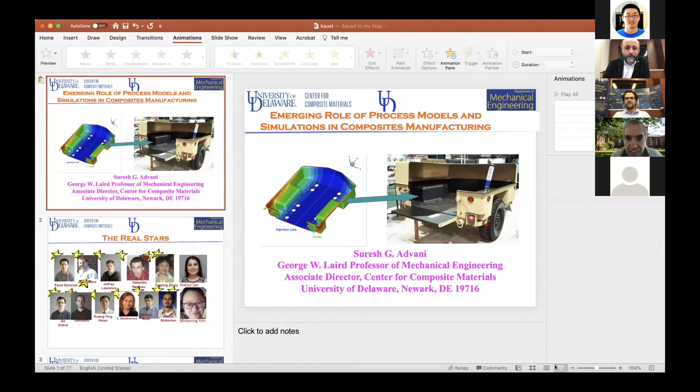In this session, we will gain some knowledge about how advanced modeling and simulation can help for processing, manufacturing, and design of composites. The first speaker in this session is Professor Suresh Advani, professor of mechanical engineering and associate director of the Center for Composite Materials at the University of Delaware. He will give us a talk on the emerging role of process models and simulation in composite manufacturing. So the floor is yours now, Professor Suresh.

Thank you for the introduction, and thank you for inviting me here. I know that we can't do this in person, but I guess this is the second best thing we can do. I've attended some of the talks, and I have actually enjoyed watching them. I know it's very difficult to keep the attention span when going through this on Zoom, but I'll try to be brief and not put too much time into extra things here.

So basically, today my goal is to show you how numerical simulations are slowly becoming more and more useful in manufacturing, with one of the simulations that we have developed over the last 25 years.

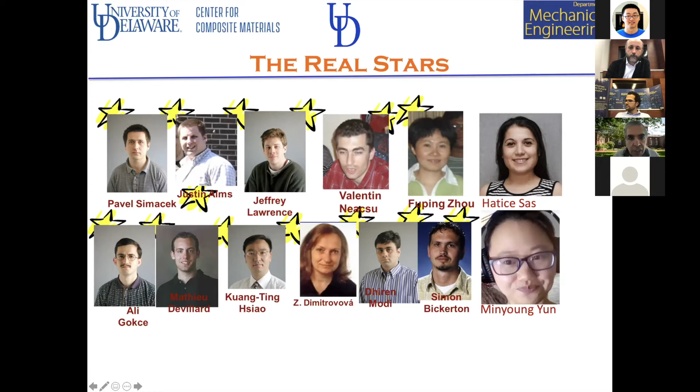Of course, I haven't done all this work myself. The real stars are the students and postdocs who have worked with me over the years, and I want to first acknowledge that they are really the responsible people for this.

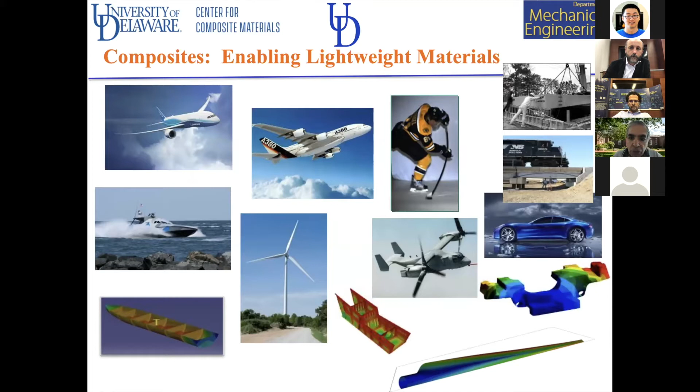Composites are everywhere, as we know. This group doesn't need me to tell them that. And as the parts become more complex, the modeling and simulation becomes more useful. So that's been the mission.

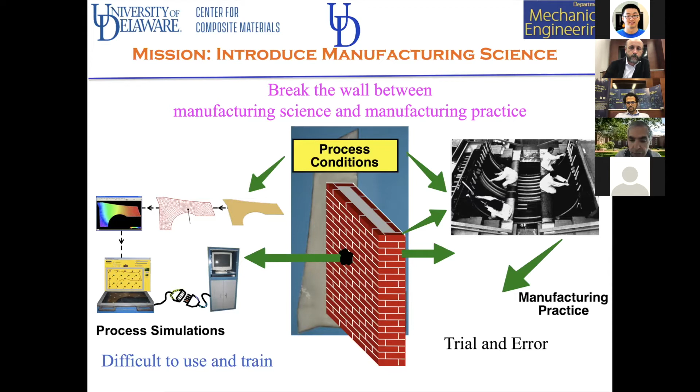Thirty years ago, people were just doing trial and error, and I thought, okay, we'll bring in some science base into it. We'll break the wall between trial and error and process simulations that will help put in the science base. The progress has been slow. Even in 30 years, people are still struggling with using simulations. They still prefer trial and error. But as we move forward, hopefully the big hurdle, which is the difficult-to-use and train issue, can be made easier, so that more people will use it on the actual manufacturing floor.

So today I'm going to focus everything on liquid composite molding processes, because that's the simulation we have developed. But the same knowledge base and simulation base can be transferred to other processes.

I won't describe the processes in detail, except that in liquid molding composites, you have a fabric that is mostly stationary, and then you infuse or inject a resin into it, so that you make sure the complete fabric is wetted, all the pores are saturated, so you have zero voids. That's the goal. And it seems so simple, but as the part gets more and more complex, the issue becomes more and more important in terms of being able to model it.

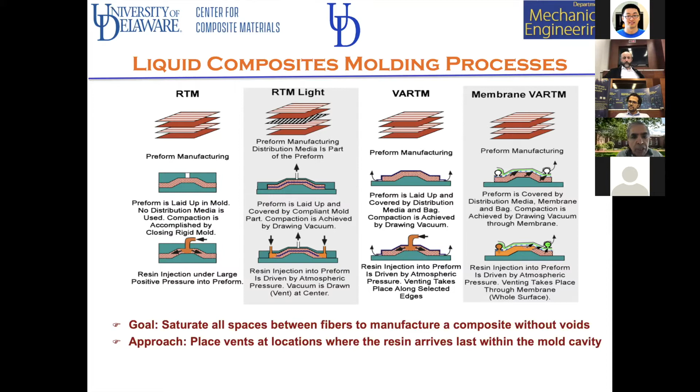So the issues and challenges are: void saturation, where to place the injection and vent location, especially if you have a huge part like a wind blade, for example, or a very complex part which has corners. Prototype development time is another issue—every time you make a new part, you spend months trying to spend money on developing the prototype. So it may be nice to get rid of that and reduce that time.

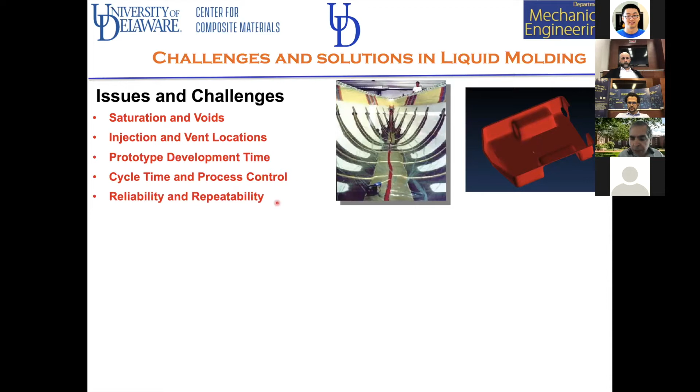And how do we introduce process control? And the biggest one is reliability and repeatability. How do we bring reliability and repeatability into composites? And of course, these are some of the solutions here.

If we integrate flow modeling in prototype design, so it becomes part of that environment, we account for material and process variability in the design process—not only the design of the component, but the design of the process itself. And one of the big things that's missing and preventing people from using simulations is the material database. There's no material database, so people say, okay, I can use the simulation, but what property should I use? And then obviously, once the simulations get better, you can optimize the process and introduce process control.

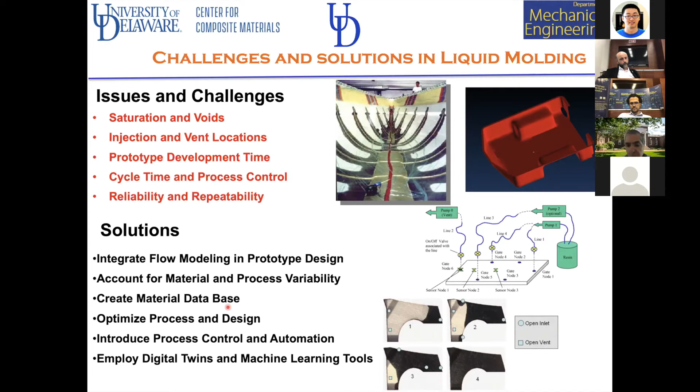And of course, a lot of people are now talking about how we employ digital twins and machine learning tools in this whole manufacturing process. So I'll touch on that at the end.

So why do we even need a simulation? Usually when you close a mold, you cannot see inside. So you inject the resin, wait for it to come out of the vent, then open the mold, and say, oh no, there is a big void here. Let's throw it away, let's change the injection location.

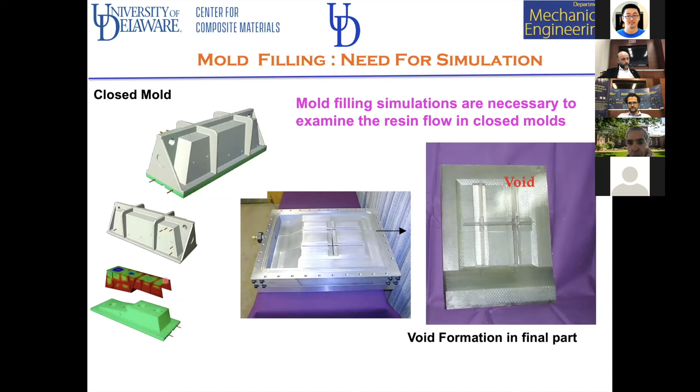So a simulation will let you see inside as to how the flow is progressing, which you won't be able to see otherwise. So what do we need for the simulation?

We need to have a numerical model and some physics of the process, which we modeled as flow through porous media. So we solve for the pressure field in a finite element environment. We have some boundary conditions: no flow out of the mold, injection pressure or the flow rate, which could vary with time. And then we track how the flow front moves in the process by applying mass conservation and Darcy's law. And of course, that was in RTM.

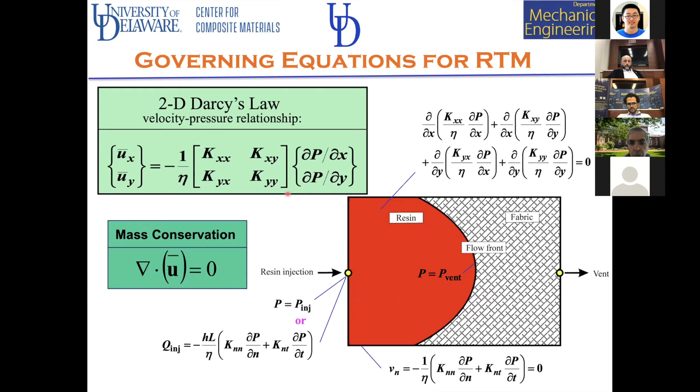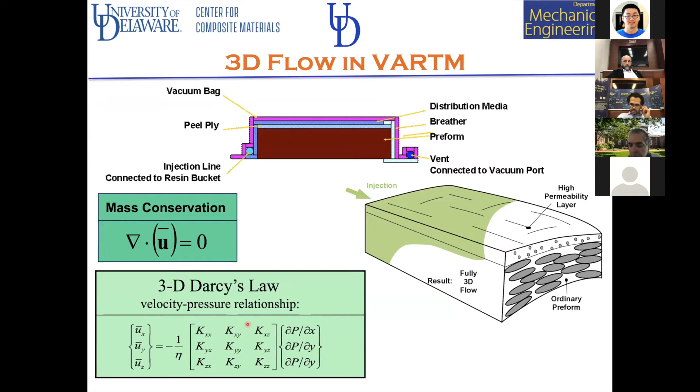In VARTM, you need a 3D model because you have a distribution media through which the flow is going really fast, so you actually have a through-thickness velocity profile. So you need to solve the problem in 3D. Now, obviously, in this problem, we have developed a finite element solution, which I'm not going to go through in detail.

But basically, what you have is you discretize your domain. And what you do is the green points are where you apply the boundary conditions. The red are where there is already resin, and the blue is where the flow front is.

So you solve the equation for the pressure, and then you use the fill factor approach, a control volume approach, to move the fluid from one control volume to another, and then update the fill factors. And that way, the ones that were between 0 and 1 will become 1, so your domain has increased, and you don't need to remesh.

You just keep track of the fill factors, and wherever the fill factors are 1, you solve the pressure equation there. Wherever the fill factors are blue, you apply the boundary condition or the flow front condition there, and then you march forward in time.

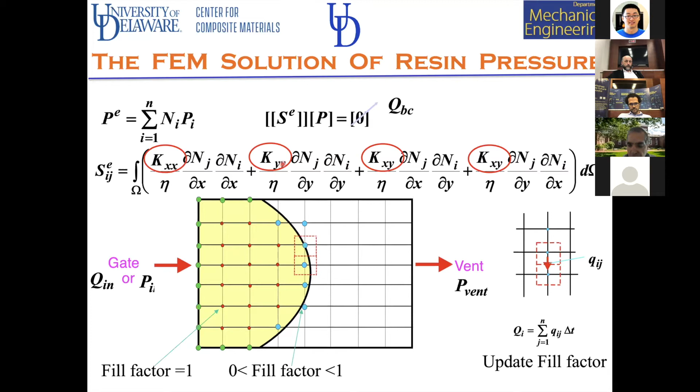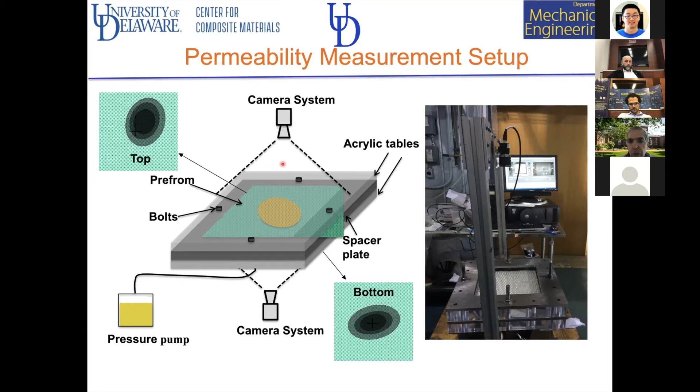And of course, the problem here is the permeabilities, right? These are material properties that we need the database for. So we have developed a setup where you can actually measure all the three-dimensional permeability values for any fabric. And then we can create a database where different fabrics' permeability can be logged in.

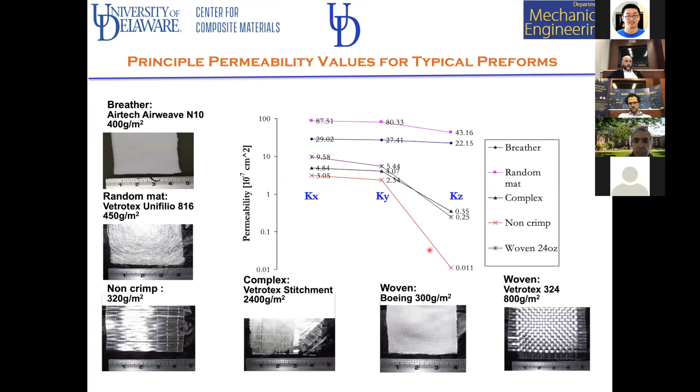So when people are doing the simulations and they know what type of fabric they're using, they can use those permeability values. Of course, this is by no means complete, but this is what one needs for us to be able to use the simulation in an effective way.

So basically, we created the simulation to make it easy for people to use. So you put in your permeability, you put in your CAD design, and if you have any draping issues near the corners, you can add those to it.

And the output is going to be basically the flow fronts, the pressure, and if you are solving for the temperature, how much the tows are getting saturated. So that's the output you get.

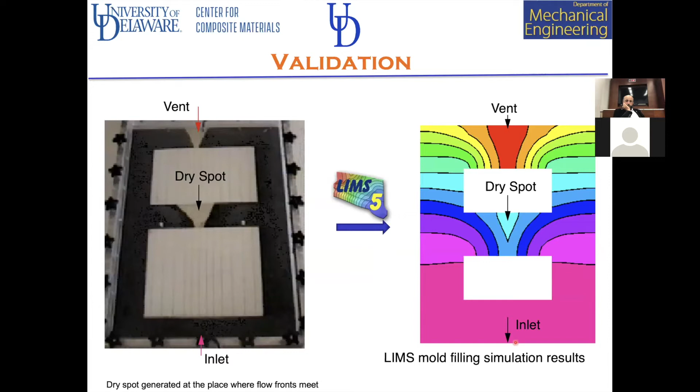And we've validated this over the years, and Darcy's law works fabulously well. This is a three foot by two foot part, and you can see how the flow fronts match very nicely.

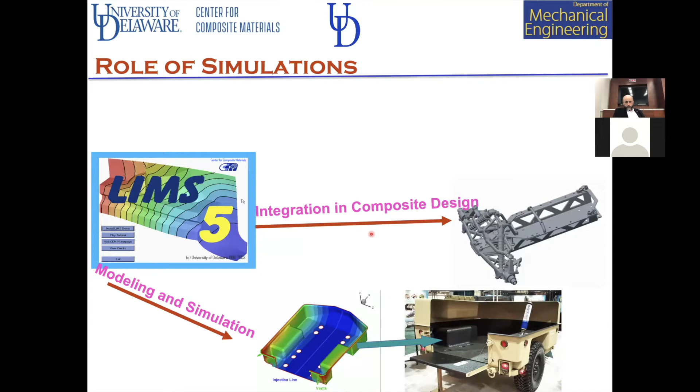So originally this was used when we first developed it, just trying to figure out where to put the gate, where to put the vent, how to optimize the gate. And then as we progressed, we started using simulation as a part of the design process, integrating it with the design process. And then we said, okay, if there is variability, we can introduce process control and optimization, so we can use it there. And eventually I'll talk about how machine learning comes into the picture here.

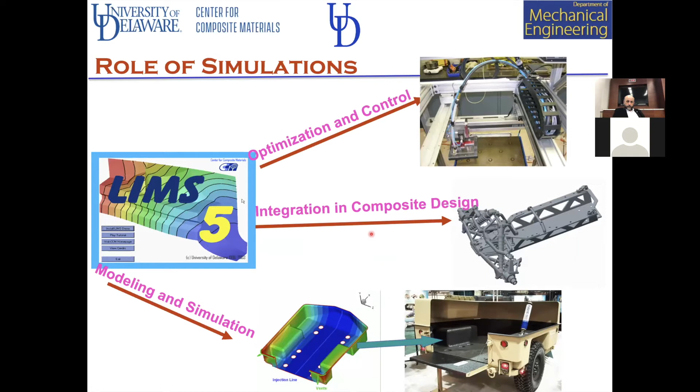So this is just showing you very quickly how you can actually do this — let me just change this into an arrow so I can play the simulation.

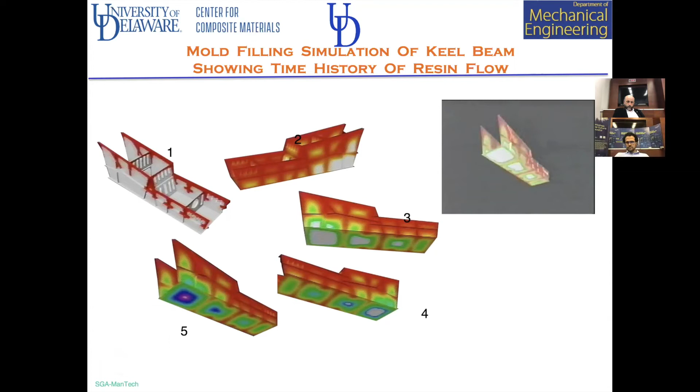So you can see that this was a helicopter keel beam part that we could simulate flow inside nearly two decades ago. That was not the issue of the simulation, but this allowed you to see how the flow was taking place, and you could change your gate and vent location and so forth.

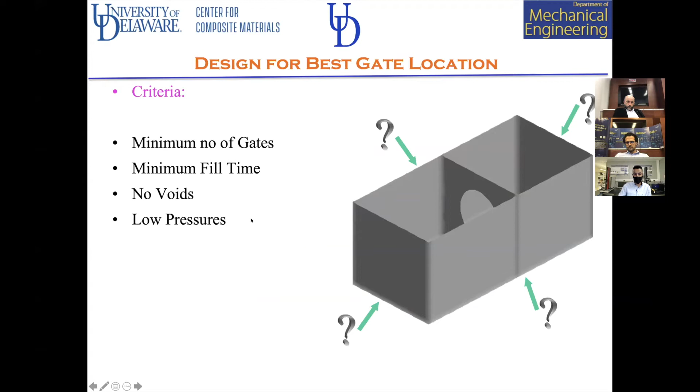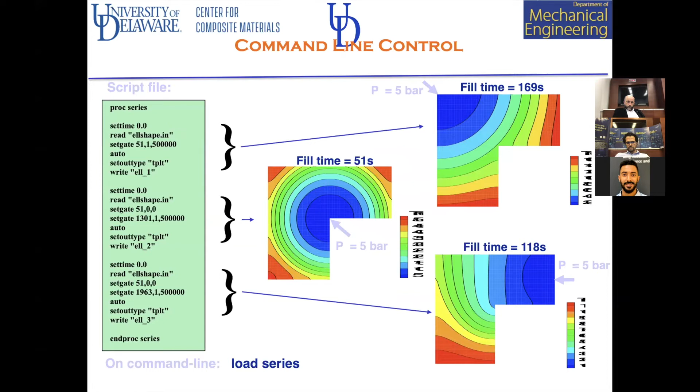Then the question came up: if I'm trying to make a part like this, I want no voids, minimum fill time, and I don't want to use very high pressures. Where should we put the gate? In simulation, you can set up the gate at every node, rerun the simulation, find the fill time, and do that at every node. So if you had 5,000 nodes, you'd need 5,000 simulations.

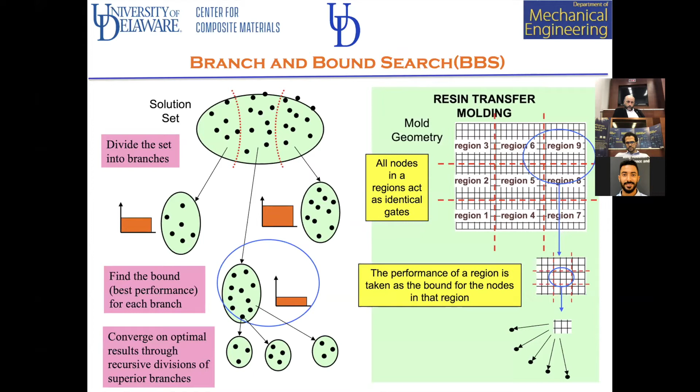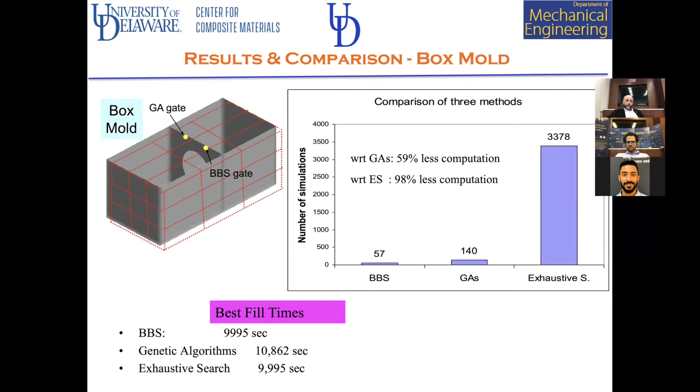So we came up with techniques such as the branch and bound method, which allowed you to narrow down the number of simulations needed and get the same answer. Using branch and bound, within 57 simulations you could find the best gate location, or use genetic algorithms to find nearly the best location so you don't get trapped in local minima, or you could do brute force, which requires 3,378. This gets out of hand if you want to choose two gates, because then it becomes 3,378 times 3,378, which is a million simulations. That's why you need some of these techniques.

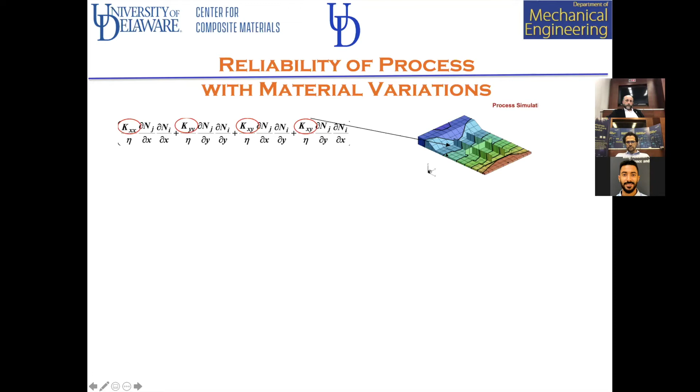That was the early part, but then the issue started cropping up that permeability in the mold may not be the same everywhere. It may not be homogeneous, it may change from part to part. So how do we address that?

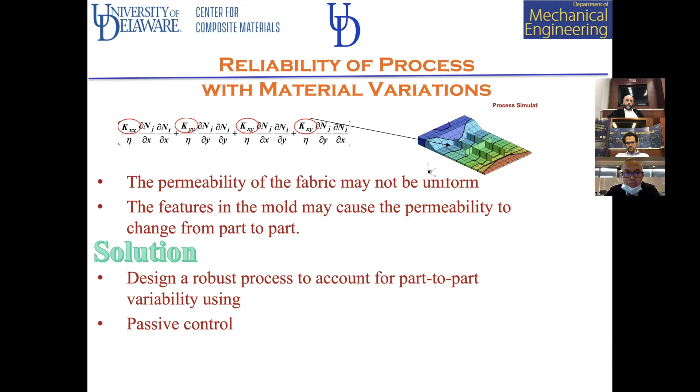The solution is to design a robust process to account for part-to-part variability. We could use passive control or active control. So how do we do that?

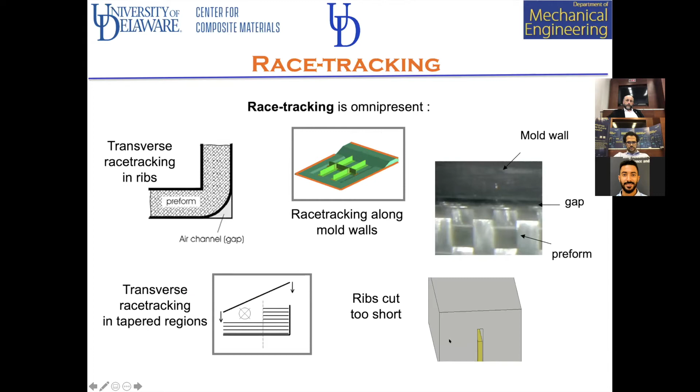First, what causes this permeability variation? When you put a fabric inside the mold, you may have race tracking along the edges, a little ply drop-off, a rib cut short, or a corner. All these cause issues such as the resin racing very quickly through there.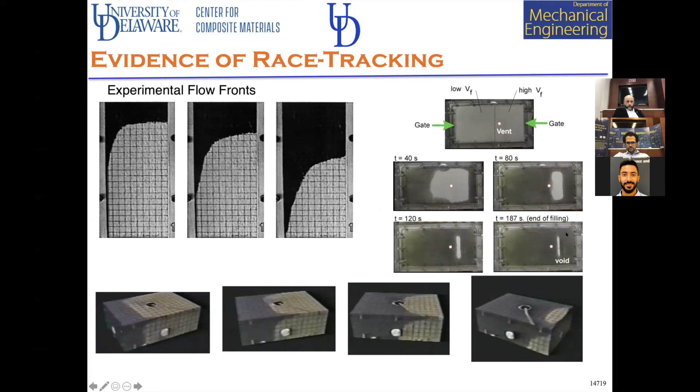Even if a simulation shows perfectly well what happens when there is no race tracking, it's not much help, because as you can see here, the simulation with no race tracking said to put the vent in the middle. But what ended up happening was, because of race tracking, the resin went around it and the vent was over here. Even if you allow the resin to bleed out of the vent, eventually you can't get rid of this void. So race tracking does cause problems that need to be addressed.

Here you can see the same thing in a 3D part, where race tracking came on the left-hand side, so you ended up getting a dry spot on the right-hand side. Around corners, we have validated that if you put a race tracking edge in a simulation, we can predict what actually happens in the mold. So it is possible to put race tracking edges and then predict what happens to the flow.

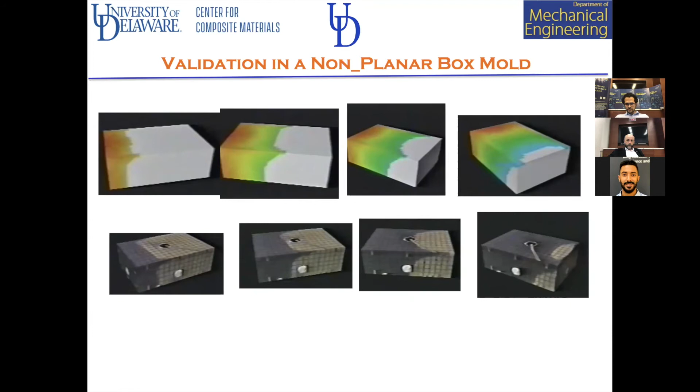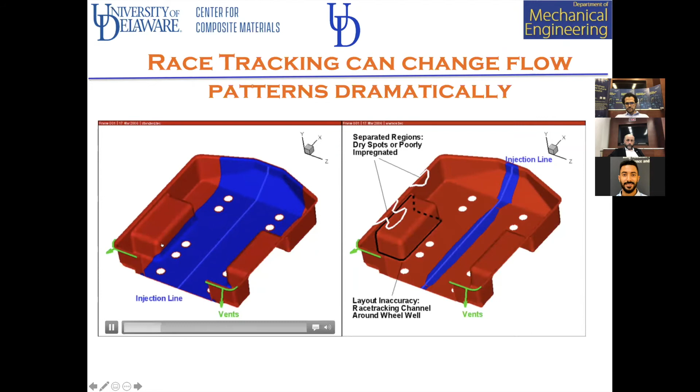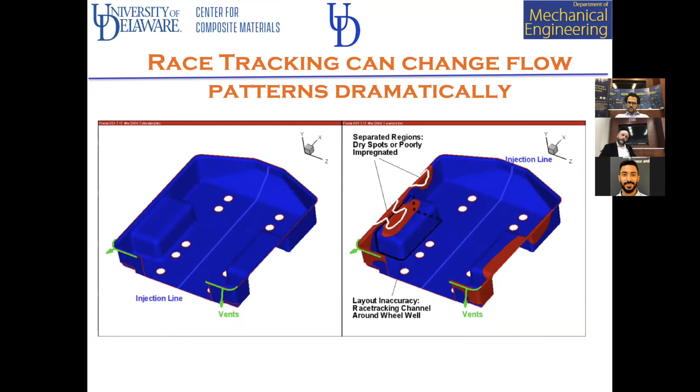For example, here you can see a part with wheel wells, where if you don't have any race tracking around the wheel wells, the part fills nicely and you'll have vents at the two ends. But if you do have race tracking around these black edges, where you didn't put the fabric properly, then the resin arrives at the vents before it fills that white area. So the white area is where your void gets trapped, because of the race tracking that happened along the wheel wells.

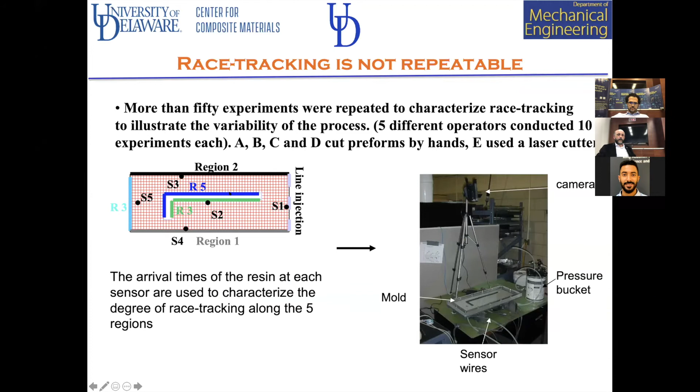So we said, let's see if we can characterize race tracking at each edge. We had some students do the same experiment 5 times, 10 times, with 5 students around, and we measured race tracking along the edges. The answer was, even the same student couldn't get the same race tracking in the experiment he did 10 times.

The race tracking strength is how many times the flow is faster on the edge compared to the bulk preform. It varied from one part to the next, varied from one edge to the next, and varied from one student to the next. So the bottom line was, we cannot get rid of race tracking. We really have to start accounting for this non-repeatable race tracking in our design process.

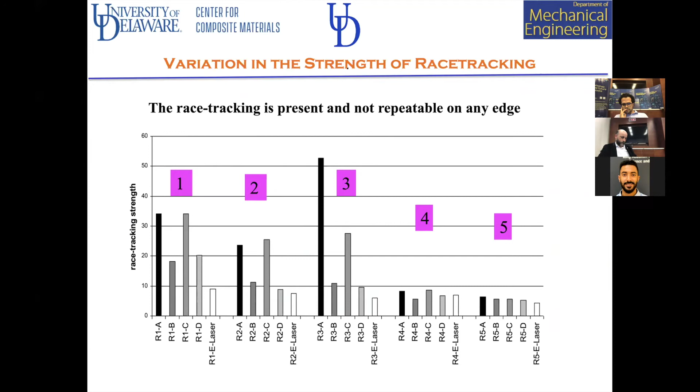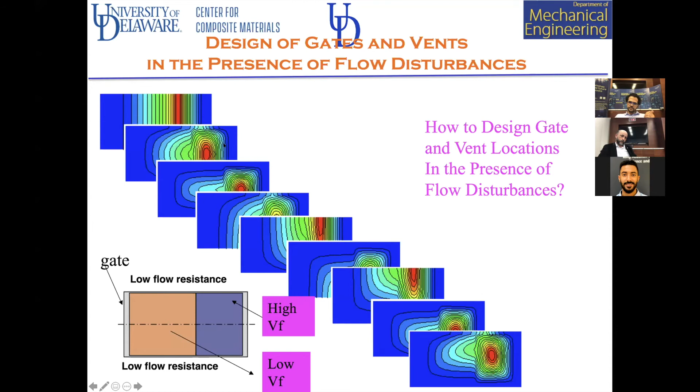So what we did was, we said, okay, let's create all the simulations: when there is no race tracking, when there is some race tracking, when there is a lot of race tracking along one edge, along both edges—all the permutations and combinations. And then we design our process based on all the permutations and combinations. Once we do that, we look at the likelihood of each scenario based on the data coming in from the manufacturing floor.

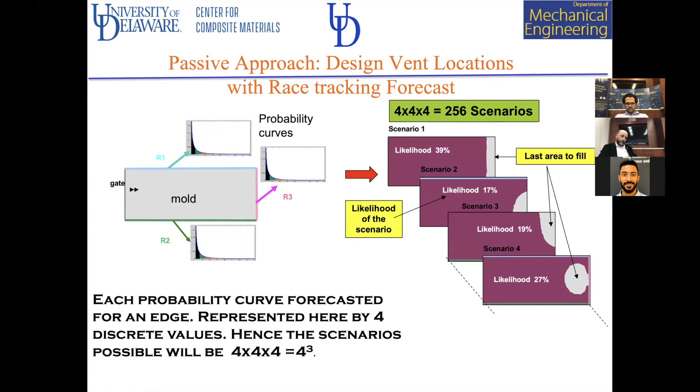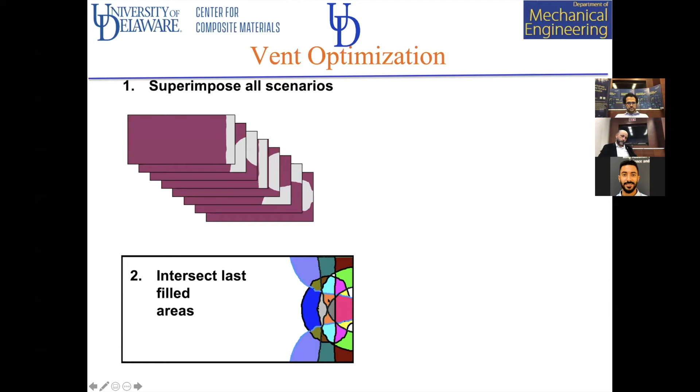We superimpose that on top of each other. And after we superimpose this, we find out where is the most likely place where the resin will arrive last. And then we put our vents over there. Like in this case, it's these two yellow areas. So that's where we will put the vents.

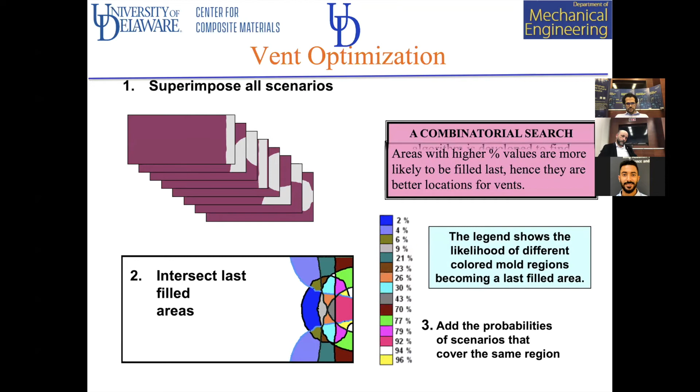So of course we won't get 100% filling every time, but at least most of the time you'll be able to do that. So here is an example of that.

The example basically shows here that if you had a gate and these two windows, and if you had race tracking along the windows, with some probability of how much race tracking will take place—most of the time there will be less race tracking, some of the time there will be high race tracking—you have all those scenarios. You can create about 1,024 scenarios, assuming there are 4 levels of race tracking along each edge.

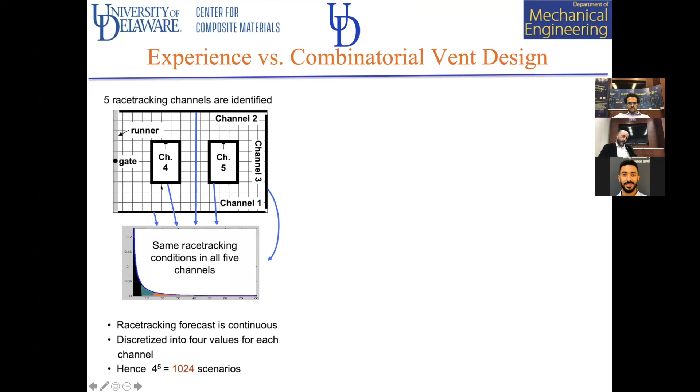And then if you did an intuitive design, you would put a vent. If you had 3 vents, you'll put one here, and one at the end. Then you ran 1,000 simulations with random scenarios. You only succeed 28% of the time.

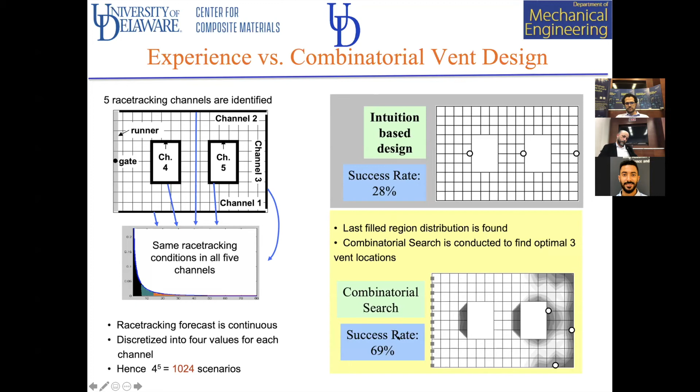If you use the approach I said, where you superimpose and take the probabilities, it says you should put the vents this way, which is completely non-intuitive. But then your success rate increases from 28% to 69%. So at least you double your success rate, but you still have a lot of wastage because for 31% of the time, you're not producing a good part out of the 1,000 parts.

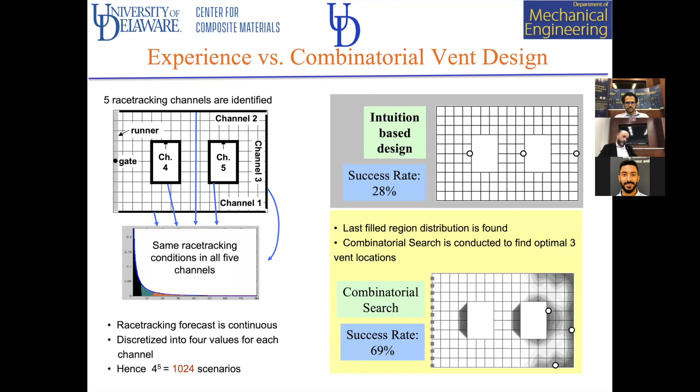So in order to increase that, what we really need to do is introduce an active approach using sensors and simulation, so that you can detect which scenario is taking place, and then you have a control action that will counteract that disturbance and give you a good part. And so you have to put sensors in the mold.

You could have a point sensor, or you can have a linear sensor or a smart sensor. These sensors are very, very easy to understand. Basically, you have these two wires, and when the resin reaches in between them, the resistance goes from infinite to finite, and the resin has arrived there. So you can use that.

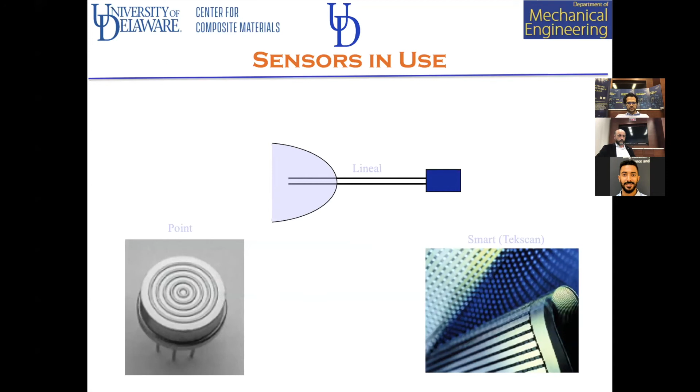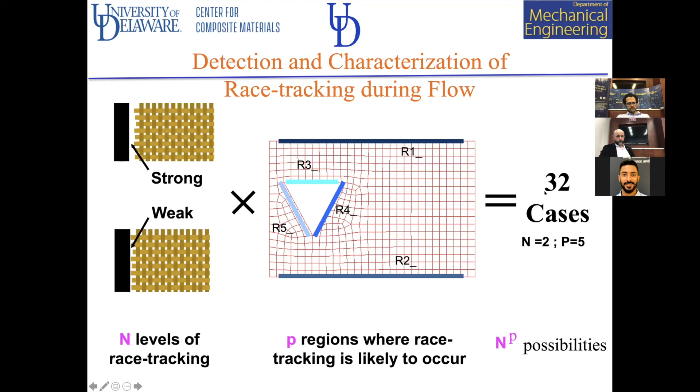So what you do is you run in the simulation all the 32 cases. You figure out where to put the sensors, so very early in the process I can find out where the race tracking is taking place. And then I have a customized control action for that race tracking situation.

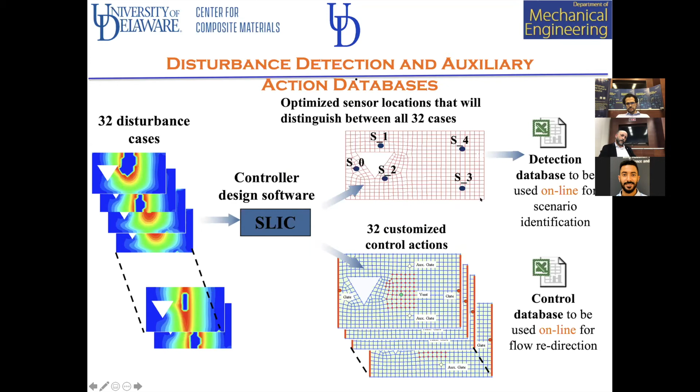I do this offline. I create a detection database. I create a control database. And then in my LabVIEW program, I have those all available in the experiment, so that when the sensors detect which scenario is taking place, the required control action will be put into practice. So you can do that by having some additional gates, some additional vents in the mold that you can close and open at any time you want.

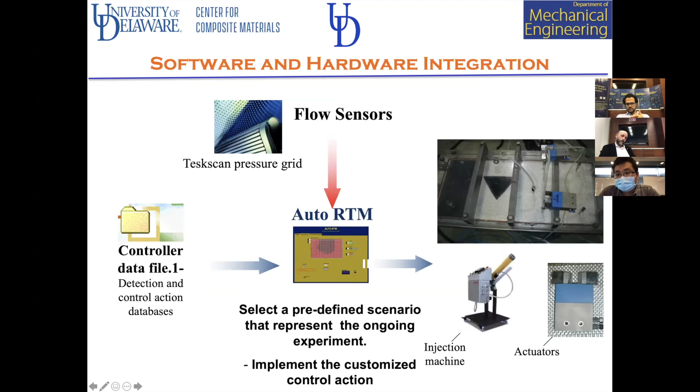So here is a scenario when scenario 29 is taking place. If you don't have any control action, what's going to happen is when the resin reaches the vent, basically you're going to have this part which is not going to get filled.

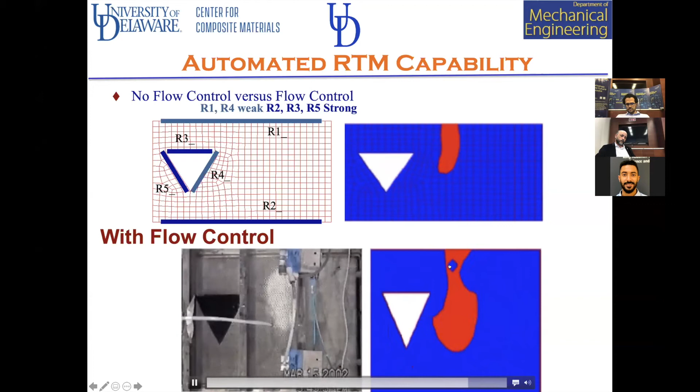Now, if you use the control action algorithm where there is no intervention, the computer controls this and detects which control action is necessary based on the sensor data. On the left-hand side is the actual experiment, the right-hand side is the simulation. It says open the gate on the right and drive the resin towards the vent in the middle. So you can do things like that.

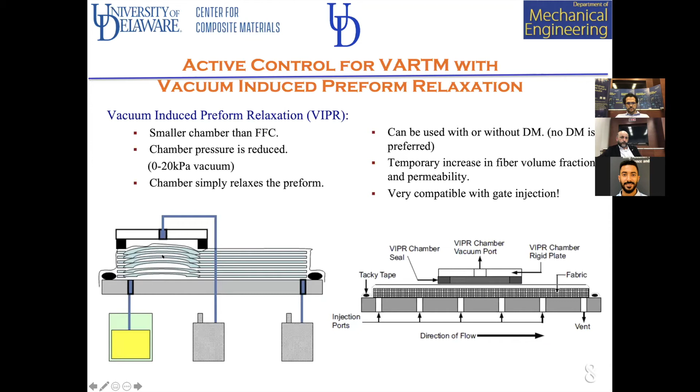Now, of course, you can do this in VARTM as well. In VARTM, you cannot apply positive pressure, but what you can do is have a vacuum chamber which will increase the permeability in certain zones and attract the resin to go there. So you built a gantry system with a camera, the camera can see whether the preform is not wet, and then it will tell the chamber to go there and suck the resin over there, because you can increase the permeability in that area.

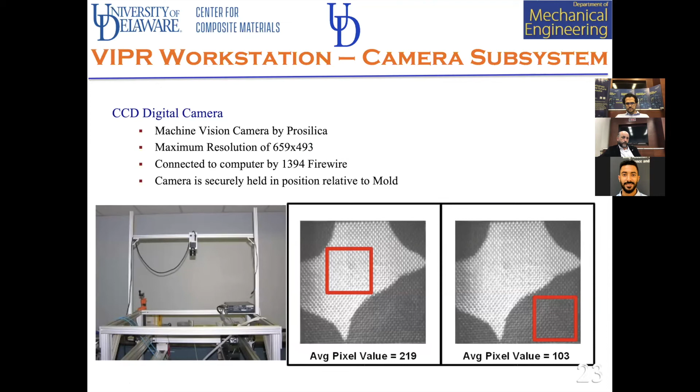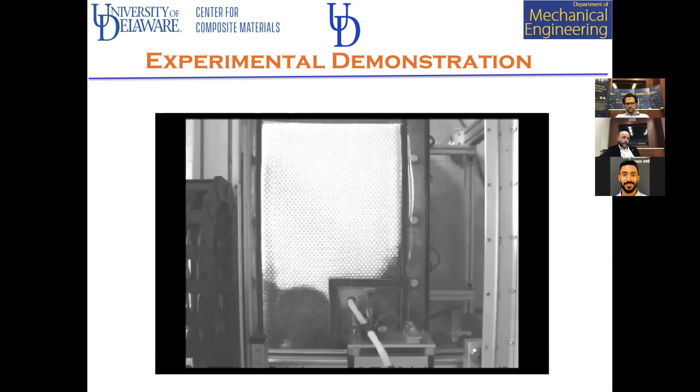And we coupled this with our simulation, so we were doing this online. Here is an example where, as you see, there will be race tracking on the left and right. And as the resin is on the left, it goes to the right, and this is all automatic. Then you can use this with a robot to actually drive the resin where you want to, based on the simulation data. So we found that using this long range control gave us practically zero voids, the adaptive control.

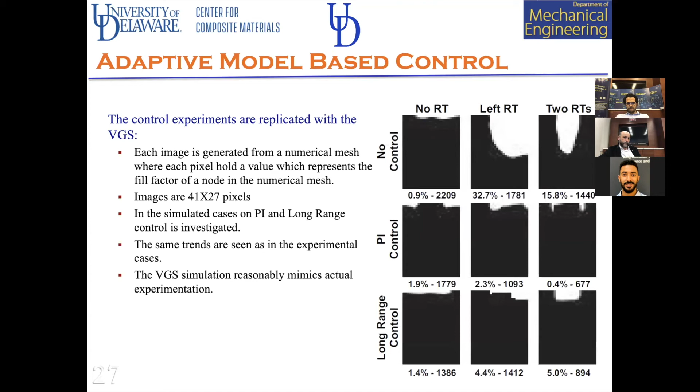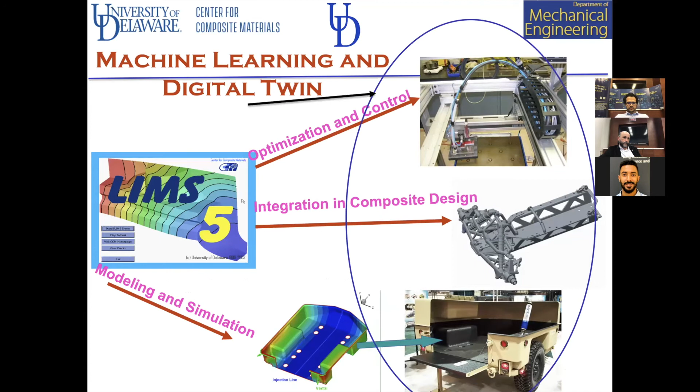So now the last part of my talk, in the last 5 minutes, is about machine learning and digital twins. What we were doing was like a digital twin already, but how do we incorporate these concepts into the shop floor? So one example I want to present to you, but this can be expanded to many other examples.

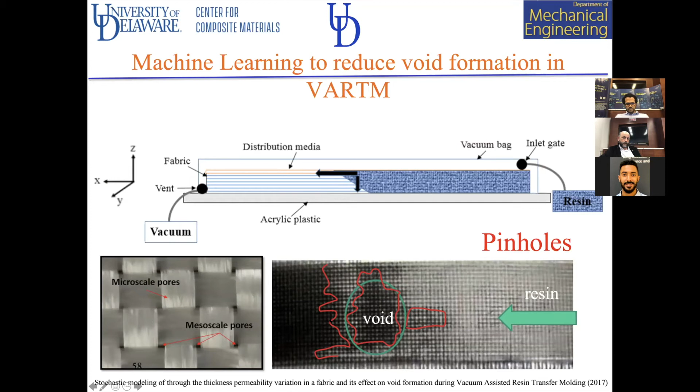For example, when you put a distribution media on the top, many preforms have these pinholes that you can see here. So what happens is the resin from the pinholes will come down sooner and then create issues. The resin is coming from the right to the left, on the top is the distribution media, and you're looking at the bottom. In certain areas you can see the resin has actually come out of the pinholes here and trapped a void here. So these pinholes have an effect on how your part is going to form.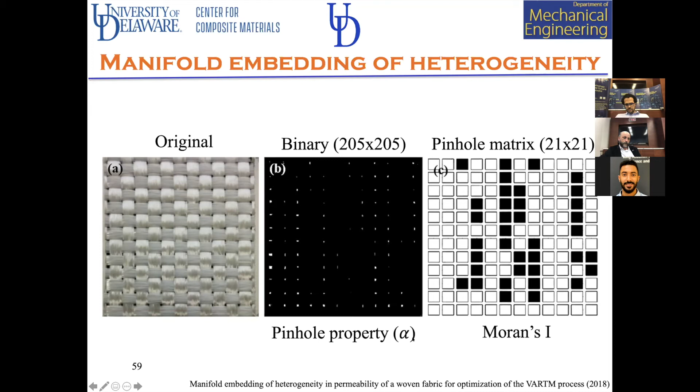So you have these two parameters, pinhole property alpha and the Moran's index I, which will characterize this fabric. We can see that if you do that, you get an alpha which shows how the permeability is changing. Higher the alpha value, more spread out are the pinholes, the bigger are the pinholes. And then Moran's index tells you the correlation. If there is no correlation, you are at a Moran's index of 0. If there is high connectivity or correlation, then you are at 0.5.

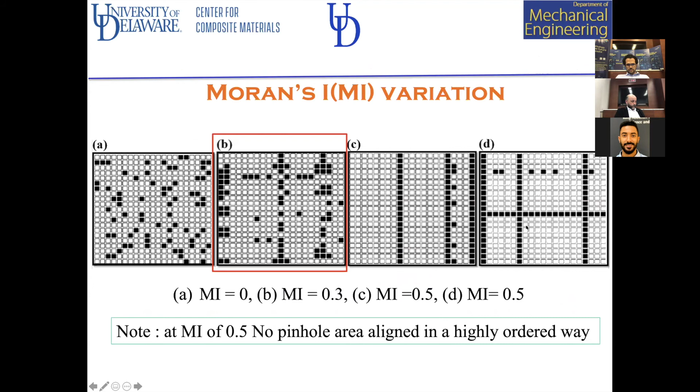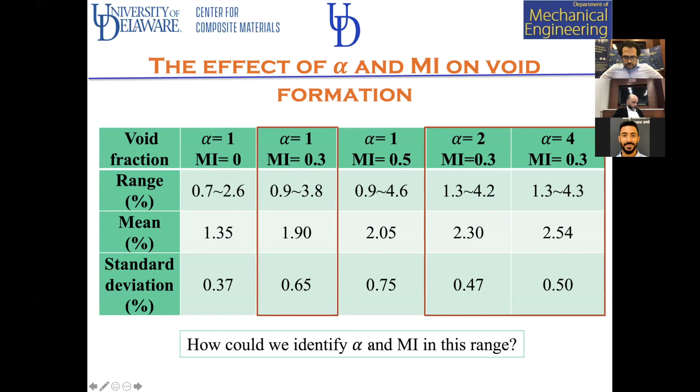So what you do is in the simulation, you can run these, you can create a lot of data by running these simulations for different types of pinholes. We can create, like for alpha equal to 1, Moran's index equal to 0.3, and Moran's index equal to 0.5, you can see how the void fraction, what is the fraction of voids you can get. We varied alpha, we varied Moran's index, and then we saw what will be the standard deviation in these cases. So the goal would be that we already have this part, but how do we identify alpha and the Moran's index in this range?

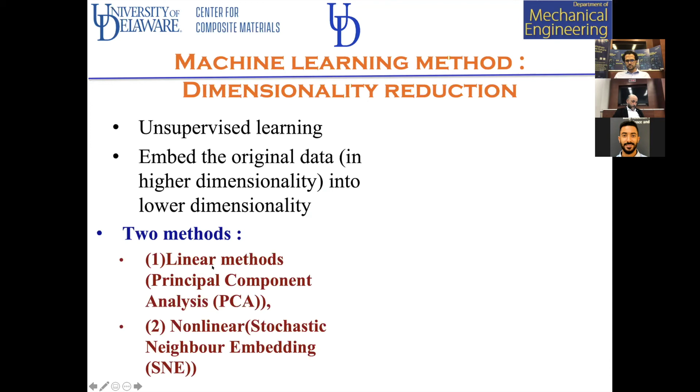So basically, this is where the machine learning method comes in. You take the unsupervised learning, embed the original data in higher dimensions, and create a lower dimensionality. And there are two methods to do this, the PCA method or the SNE method.

So we use those and basically applied that to the fabric. And we converted 40,000 pieces of data and 400 pieces of data into much lower dimensionality.

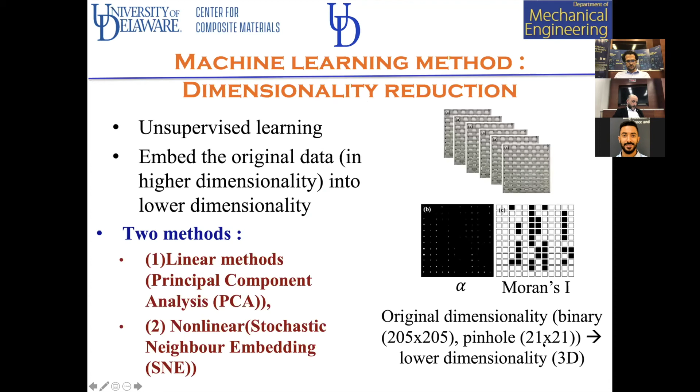And the way we do that is there is a training step. We took 450 training samples. We ran it through a fast Fourier transform, the PCA analysis, and we created a 3D representation for alpha and the Moran's index. And then in the testing sample, you take the fabric that comes in from your fabric maker, and then you figure out what is the alpha and Moran's index for that.

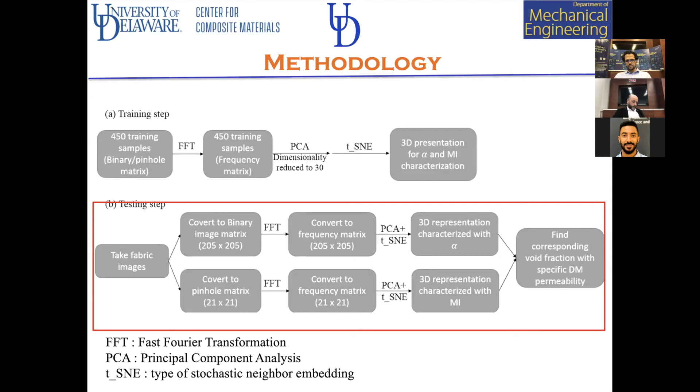By comparing it to the data matrix that you have. And so this is the training step data that you've created.

What happens in the lower dimensionality is that they bunch up together. So you can see that for alpha equal to 1, 2, and 4, for all those combinations, they sort of bunch up together. And so this is the training step that has created this for you.

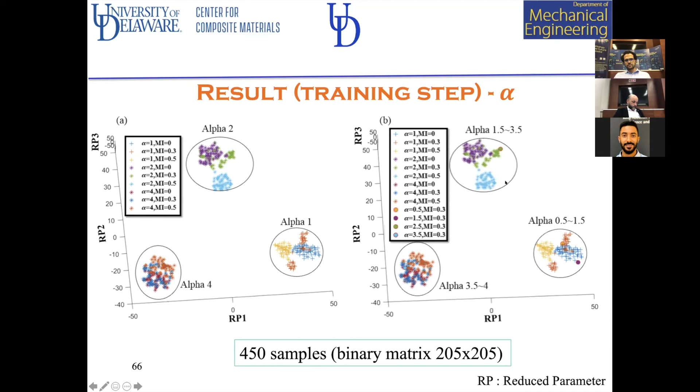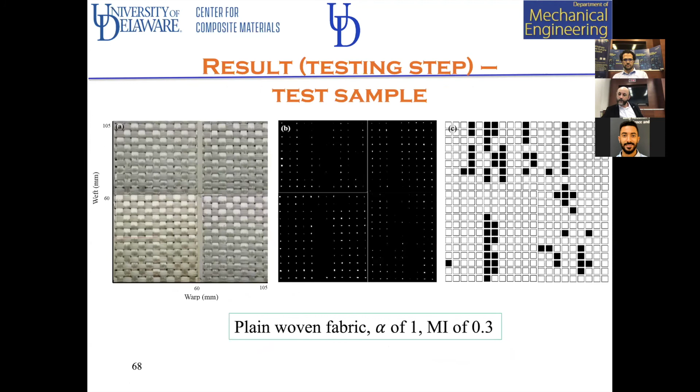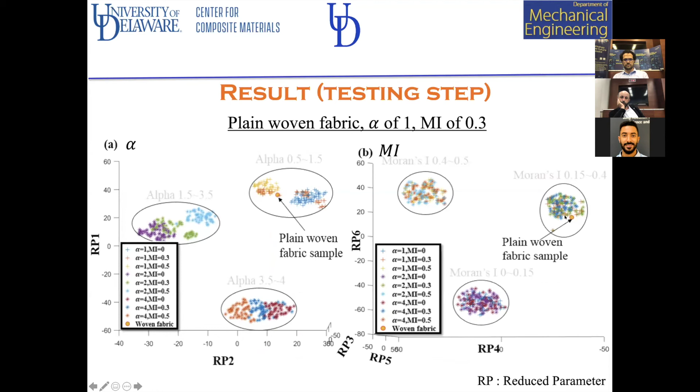So the alpha value is going to be here for that, and the Moran's index is going to be over here. So I have identified immediately what those things are, which tells me that, okay, for those values, if I use these different distribution medias, this is the void fraction I'm going to get.

So basically, it allows you to identify all those parameters, and you can that way characterize a fabric, what kind of variability is going to introduce into your process. And if it's going to be too much, you can send it back to the manufacturer and say, I want a much tighter fabric so that I don't get many voids.

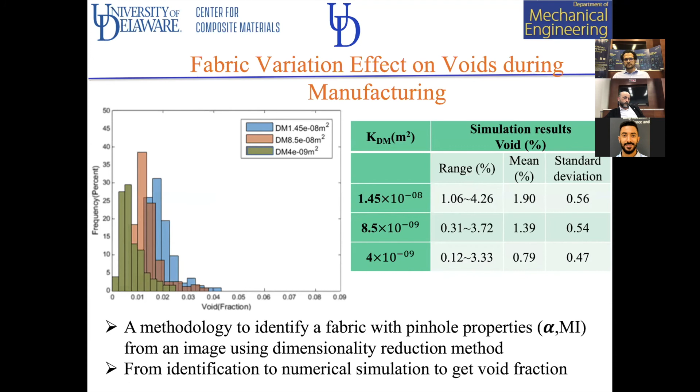And so that's another place where you can use the simulation. So basically, the role of simulation is expanding. It started with, okay, here is what you want your vent and your injection to be. Then once you have different variations, how do you address that so that in the end you get a good part.

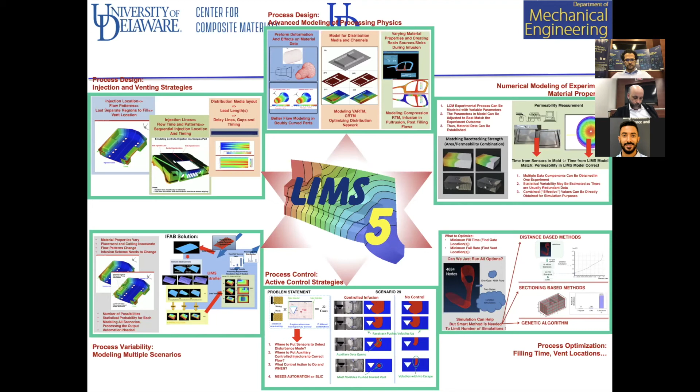As it was said yesterday, that you get the part right every time. And one could then put this into an automated manufacturing setup where all the variabilities will be handled by the process.